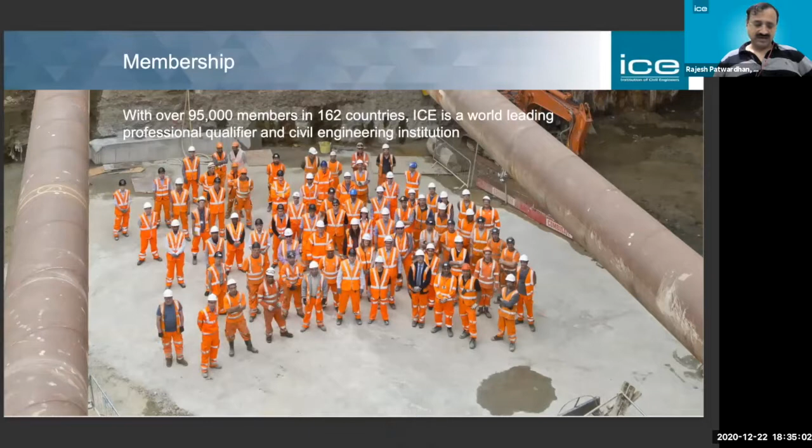Talking about ICE and ICE Mumbai, I would just like to remind you all that ICE is a global organization with more than 95,000 members across 162 countries across the globe, and it's been around for more than 200 years. So it's a very old organization, a very highly reputed organization, for the quality of members that it brings in, for the quality of programs and events that we conduct. And I'm very proud that Genesis Tech Talk has been able to live up to the reputation of ICE.

So benefits of membership, as you would expect to see, events like Genesis Tech Talk, we have been conducting conferences, we have been conducting various mentorship schemes, and we are actually providing a lot of mentor support to professionals who are aiming to become chartered, professionally qualified through ICE. And we have got a number of members who are mentors. I'm probably sharing some information about that too.

The ICE benevolent fund is a very interesting concept. People who need help, financial help, because of various problems that they have been facing globally, once you're a member of ICE, you have access to the fund. So I think it's a great source available for supporting people who are struggling either financially or for some other reasons. And I think as a member of ICE, you will be able to avail a lot of benefits becoming a part of ICE.

Moving further, there are typically five grades of memberships, and one grade that's missing over here is the associate membership. I'll briefly talk about that too. You can engage with ICE by being a student member, and immediately after you're a past student, you can become a graduate member. Subsequently, work towards becoming a chartered member or a full member of ICE, and the highest grade of membership currently existing is the fellowship.

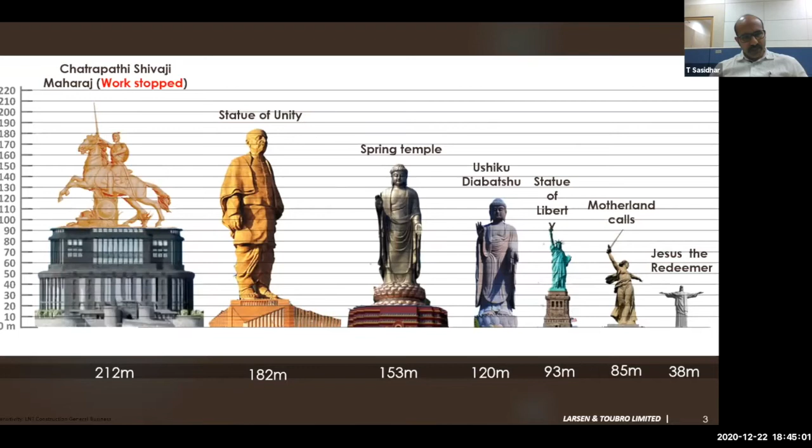Now, when we put different statues in one slide, see how this particular statue looks. Right now it is 182 meters tall, and this is the tallest statue. In fact, we started working on the Chhatrapati Shivaji Maharaj Memorial in 2018, and then it stopped because of certain reasons. And presently there is no work going on. Otherwise, that would have been the tallest statue, which is around 212 meters.

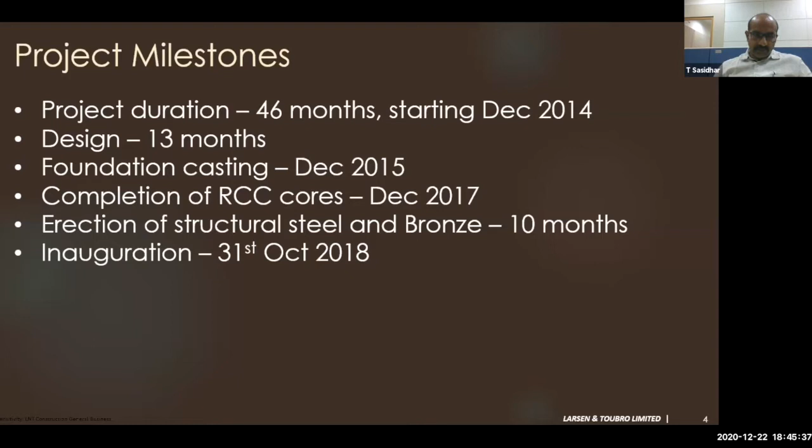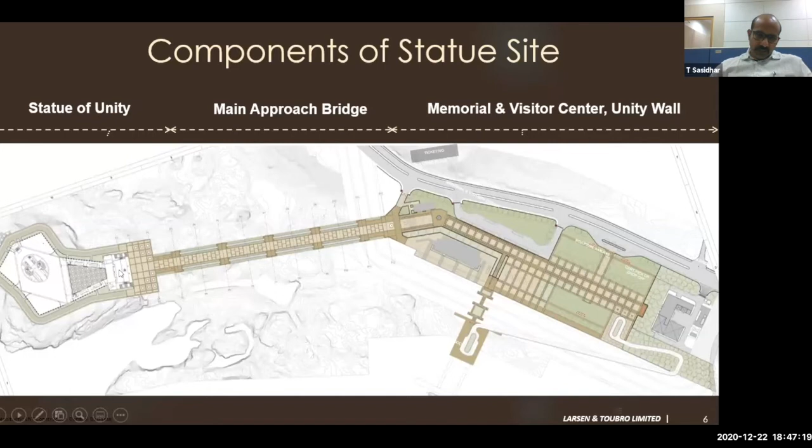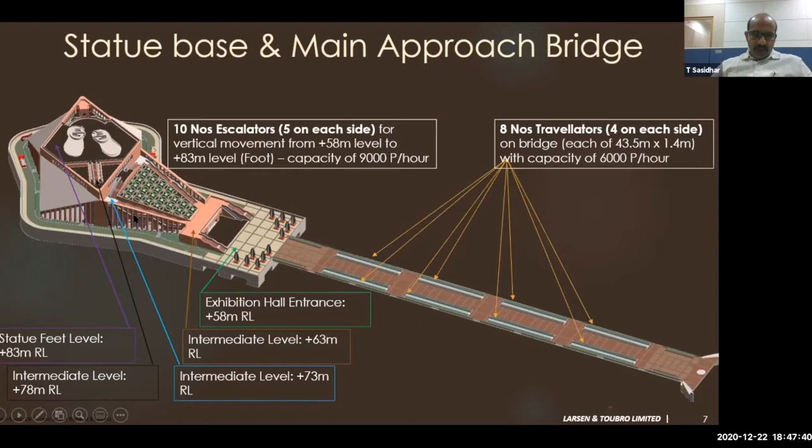We have created a unique feature in the viewing gallery where from the front side of the statue, you can see the dam, and on the right side of the statue, you can see the downstream side of the river. So this is how the entire gallery was created. This is a completely air-conditioned gallery. I'll play a short video of 7 minutes so that you can see how the entire statue was done.

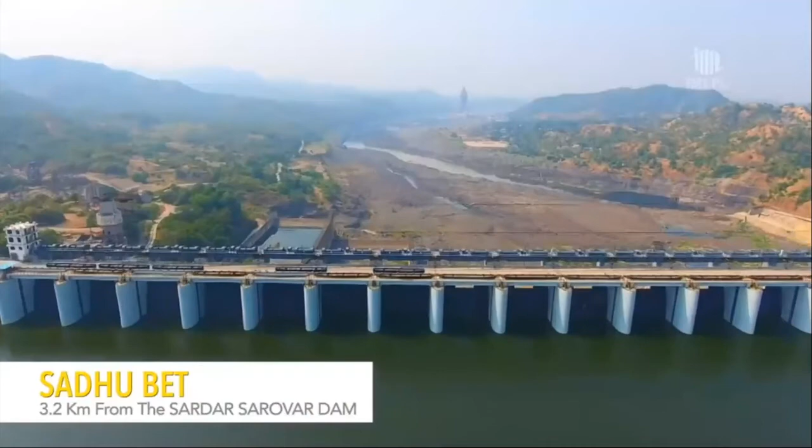On 31st October 2013, Shri Narendra Modi, the then Chief Minister of Gujarat, laid the foundation for the tallest statue in the world, the Statue of Unity. In keeping with its ethos, L&T took up the challenge head-on. Located on Sadhu Bet, 3.2 kilometers from the Sardar Sarovar Dam on the Narmada, the Statue of Unity is an unparalleled confluence of engineering and art. Although L&T had successfully completed a plethora of prestigious projects, including power plants and commercial complexes, a structure of such scale was one of a kind.

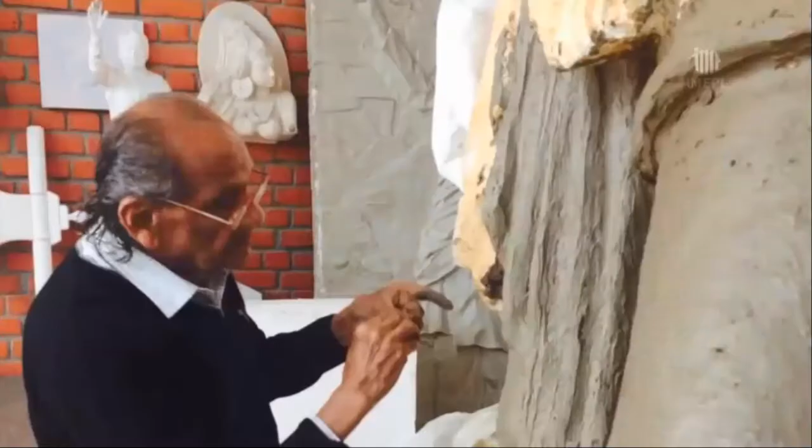The honor of sculpting Sardar Patel's likeness went to Padma Bhushan awardee Shri Ram Sutar. The first challenge was to select an apt pose and expression to do justice to him. Although L&T's role was that of an EPC contractor, they still took active interest in the selection process. Extensive discussions with historians and experts ensued. After sifting through thousands of photographs, the team was unanimous in how the statue should look. Shri Ram Sutar created sculptures in varying sizes, honing every detail again and again. The latest 3D scanning techniques and computer-controlled production ensured accurate reproduction of minute details.

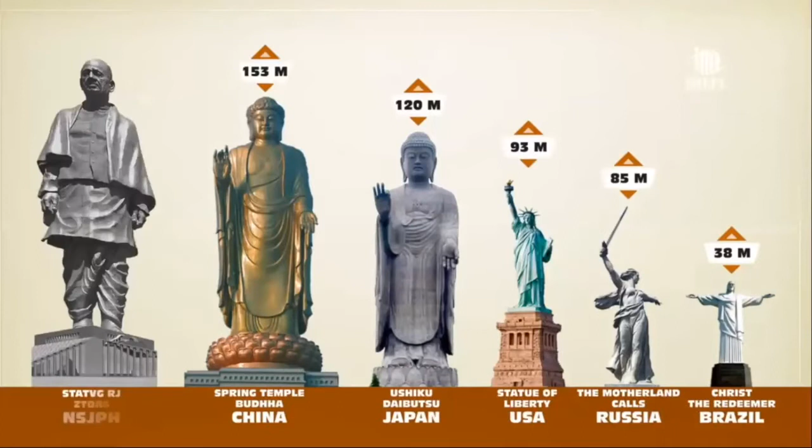Immense statues the world over have a broad base to achieve structural stability. Sardar Patel's statue was slated to be the tallest ever, and the greatest task was to achieve the design. His dhoti needed to end above the ankle. He is in a walking stance, thus the feet were not parallelly aligned. The assertive stride meant a gap between the feet. But the L&T team was equal to the task.

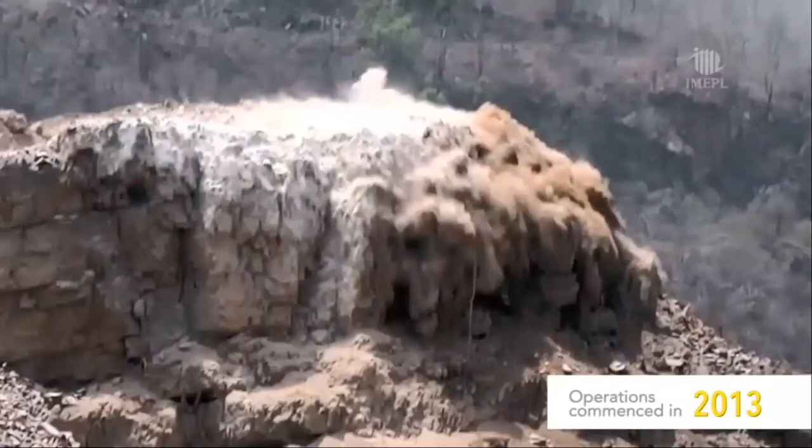Operations commenced in 2013 with exhaustive surveys of the land, riverbed, river and wind. This was followed by critical engineering design, a test of L&T's experience and technical capability. In such a remote location, planning and logistics would be the key to all the operations.

The Loha campaign was launched in earnest with a view to employing used implements donated by farmers around the country as a symbolic tribute. This iron forms the steel rebar in the raft foundation, a homage to the Iron Man of India.

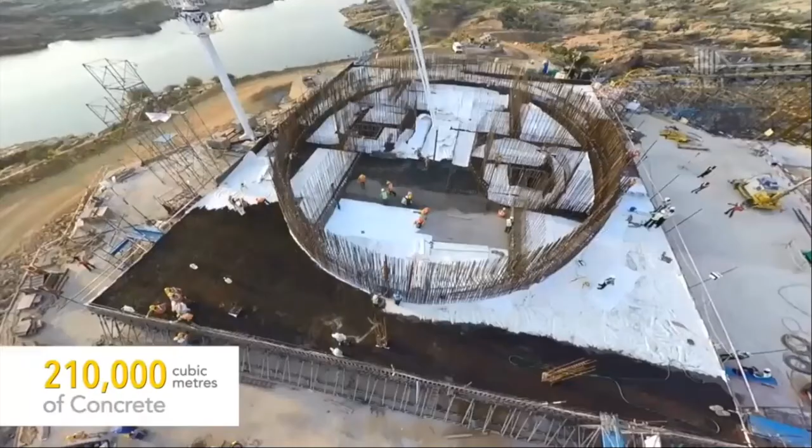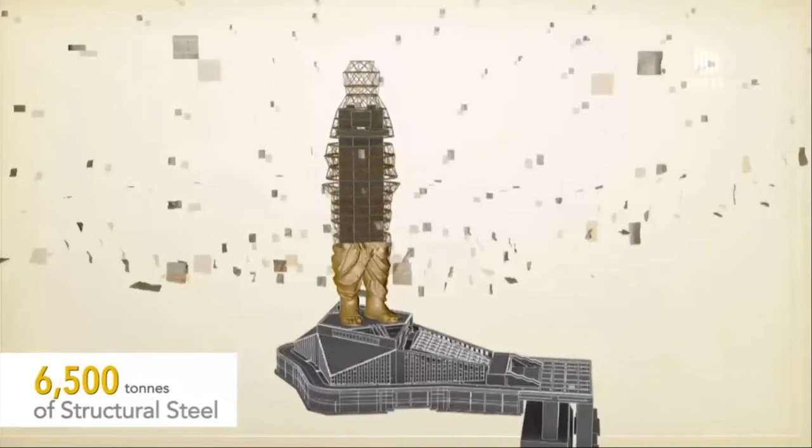A reinforced concrete core, created with critical concreting methods, gave the structure a stable base. This would support the primary and secondary steel trussing. The bronze plates then covered the entire structure, forming the sculpture. Locally available sandstone and Banswara marble has also been used.

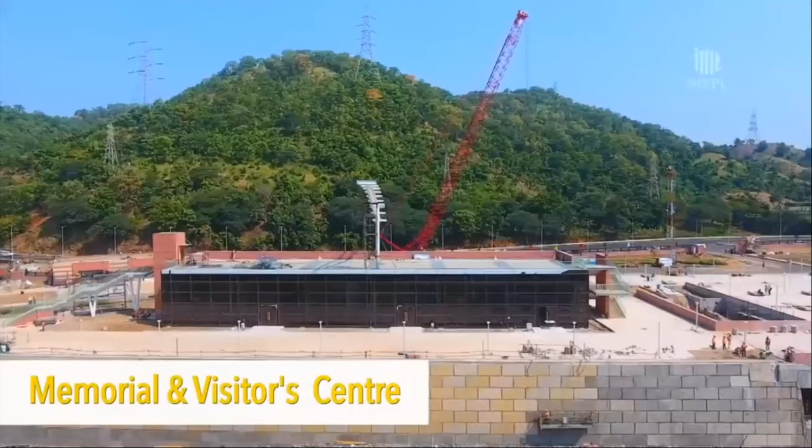Besides the statue, other key elements like the memorial and visitors center, main access bridge, bridges and roads were made to precision. The Shresth Bharat Bhavan is a 3-star facility for the tourists and guests. To bring socio-economic development to the region, students and vendors from nearby villages and towns were also trained for the project, thereby generating ample employment.

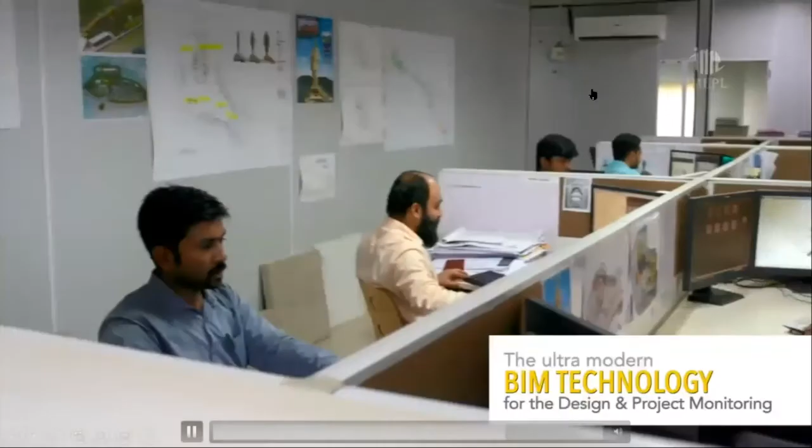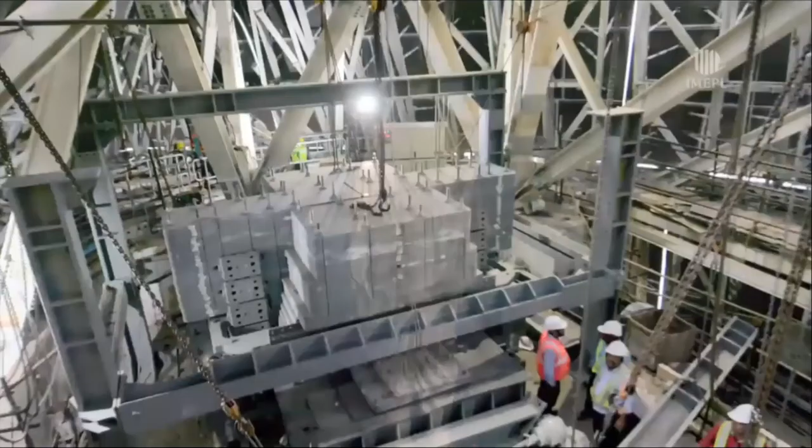The ultra-modern BIM technology for the design and project monitoring brought synchrony between the team and 30 consultants globally. The statue houses two 250-ton suspended tuned mass dampers to make it stable enough to withstand violent winds plus seismic activity. L&T created macro panel assemblies on site for the smaller micro panel bronze castings. This ensured speed and seamless assembly.

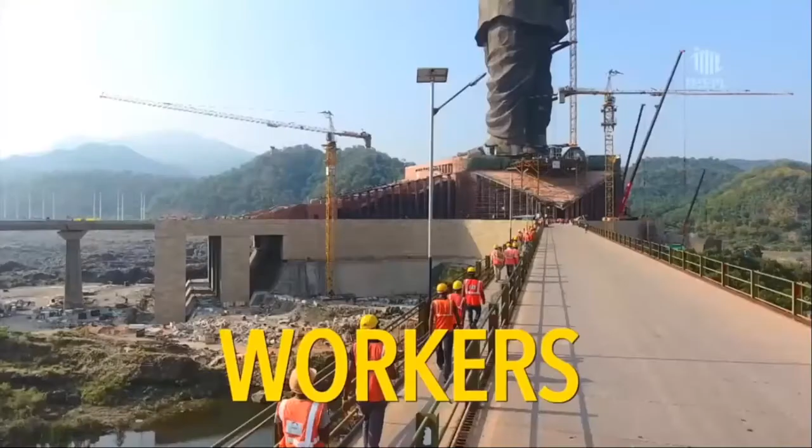Every plate was unique and RFID tagged and bolted in its place. As work progressed at blazing speed, the engineered structure transformed and the statue began to take shape. Designers, engineers, experts, specialists and workers from different parts of India have toiled night and day in a united effort unto one goal: the Statue of Unity.

Colossal enough to remind future generations of his epochal contribution. A structure as enduring as the vision of modern Indian nationhood. As Sardar Vallabhbhai Patel himself said, manpower without unity is not a strength. Only when harmonized by unity does it become a spiritual power.

That was a very short video which shows a complete glimpse of the project. Now I will take you further on various aspects. The entire project was designed to handle around 15,000 visitors per day. But after inauguration in 2018, we came to know that on peak days, like festivals and weekends, the crowd used to be more than 30,000 to 40,000. So already the facility started getting cramped.

And the viewing gallery was designed to take 2,000 passengers per day. It was not designed to take all the visitors to the viewing gallery, only a specific number of visitors, because of the limited provision of lifts inside the statue. And the statue is designed for a wind speed of 180 kilometers per hour, and it was designed for seismic zone 4.

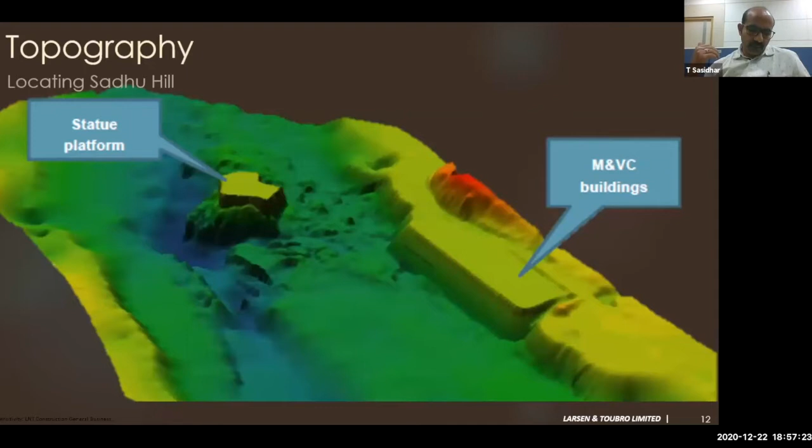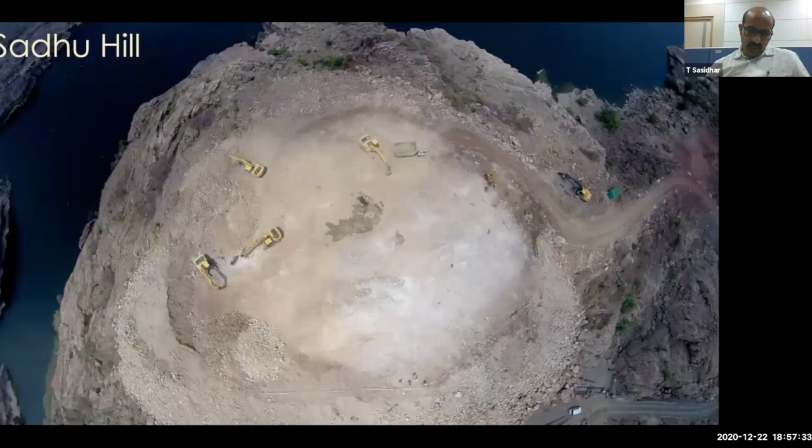And this is how the topography looks when we did a complete bathymetry survey, topography survey, and various types of surveys, merging all the details to see how the riverbed and contours look, and then to take appropriate decisions and study the water flow effect on various embankments. The work started with cutting of the hill to reach the foundation level. These are some of the photographs.

Now coming to deriving the statue profile, this is one of the most important aspects of the statue. How do we derive the entire profile of the statue, from a 6 feet tall person to 182 meters height? Something which is unique. So each and every detail of it has to be developed in a systematic way. The entire process started in August 2014 and concluded in May 2017. Multiple steps were followed.

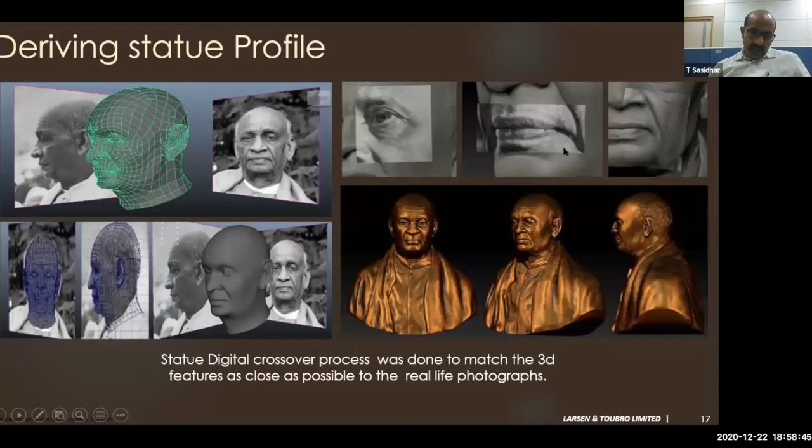Initially we were given a particular posture, the one available outside the Ahmedabad airport, where Sardar Vallabhbhai Patel is in a walking posture. That posture was given to us to start the entire design. Then various meetings were conducted to see how the face, the eyes, the lips, the wrinkles and the head should look, and each and every aspect was to be detailed precisely.

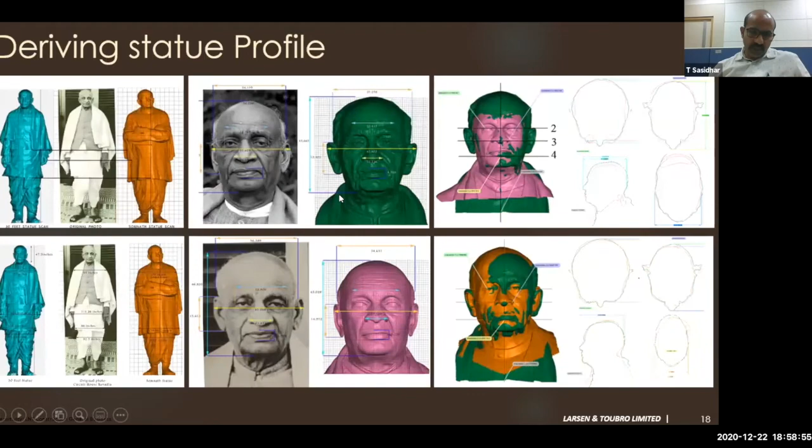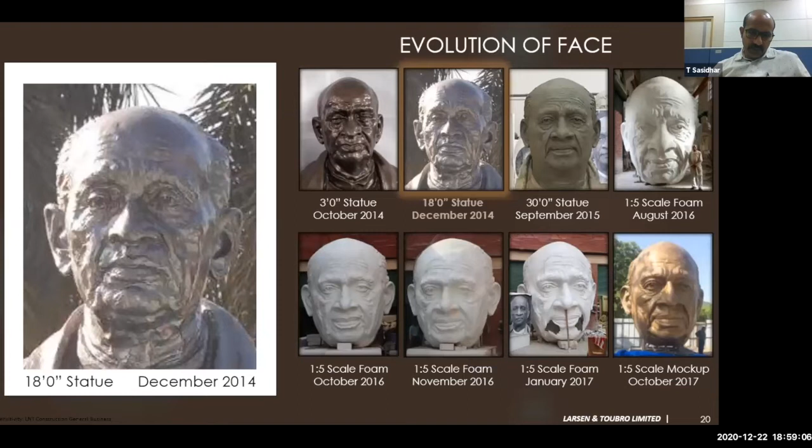This is the photograph which was given to us, and based on this, the sculptor developed various models. It started with a 3 feet statue in October 2014, then we went to an 18 feet statue, and then a 30 feet statue, done in 2015. We got principal approval of the face, but we required a lot of corrections in the face, and then we did a 1:5 scale foam mock-up in 2016.

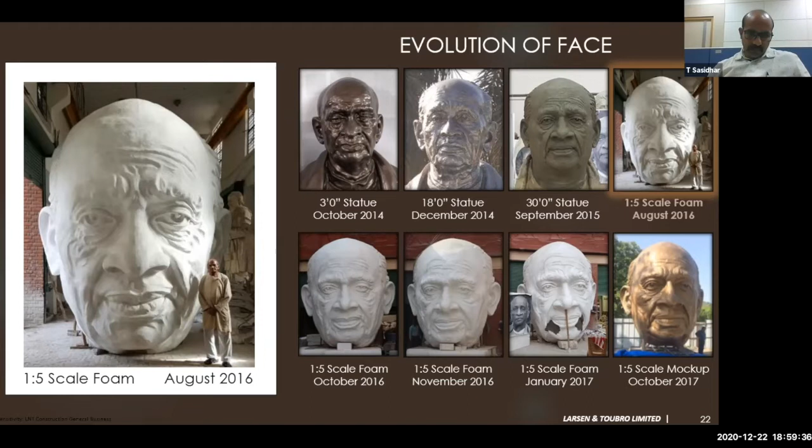This is the 1:5 scale mock-up, and this is the same head which is actually kept in the base of the building. Later on, certain corrections were done in October 2016, some more corrections in November, and then finally in January 2017, this was finalized.

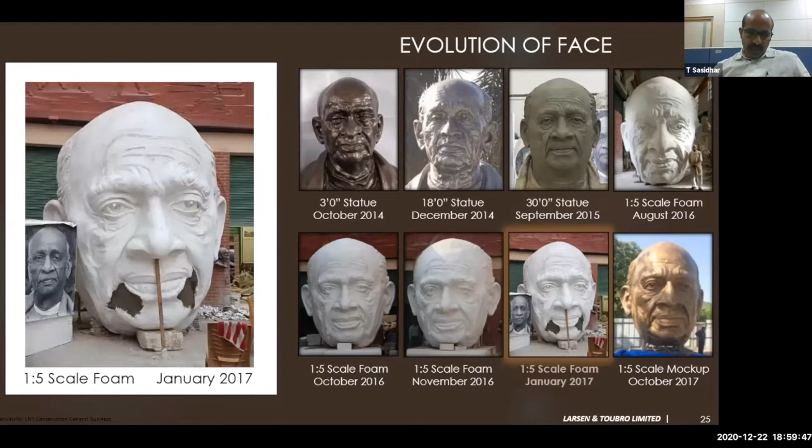And then we finally came up with the actual bronze 1:5 scale face, and this was finally moved to the museum where it was displayed. So it was an elaborate exercise to arrive at the face and how the expression looks like, and each and every aspect of the character of the face. It's not only about the face, each and every parameter of the entire body, like how the shirt, the shawl should look like, how the dhoti should look like, how the various parts of the body should look like, how the button of his jacket should look like.

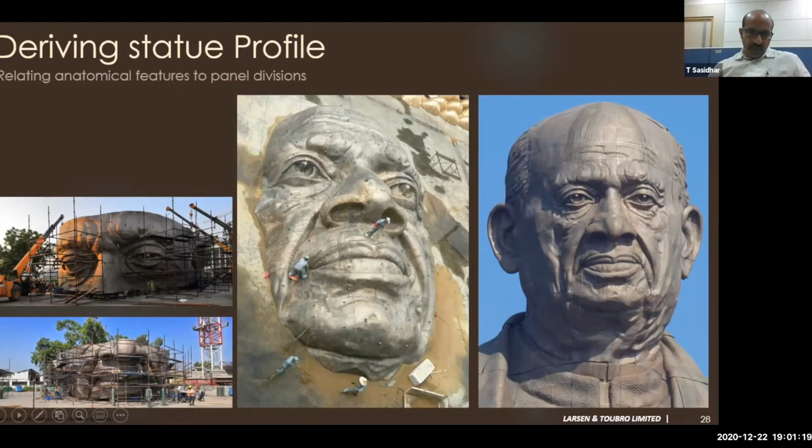And we also did a study on how the statue will age and how the statue will change its color, because it's a bronze, and we have not given any coating to the bronze. It's a natural finish that we have given to the bronze alloy. So in a natural finish, it will form a patina, and it will change its color from this brownish color to greenish over a period. It is exactly similar to the Statue of Liberty. Right now in USA, you can see the Statue of Liberty is completely greenish. That is because over a period of time, the alloy will change to greenish. So this particular alloy also will change to greenish after certain years.

So basically this alloy consists of copper 88%, tin 8%, and zinc 4%. So this is the composition. The tin is basically added for strength.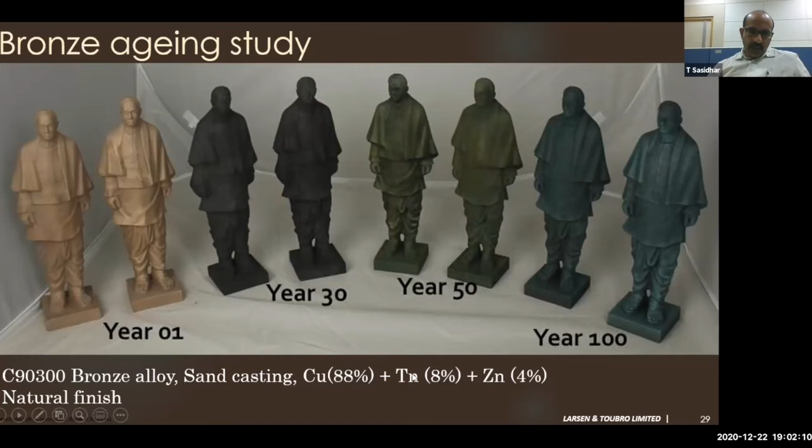And coming to the actual design, we were asked to design the structure for 100 years design life. There are few codes which talk about 100 years design life. And when we say 100 years design life, the selection of each and every material and its use is very, very important, and defining the durability of the materials is very important. This is where the experience of the consultants comes into place to define what grade of concrete, what kind of steel, what kind of coating for the steel you need, and what is the cover.

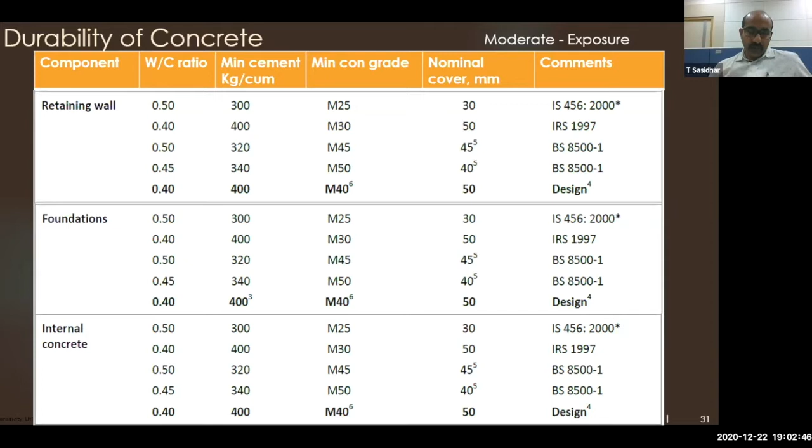All those parameters are derived based on the 100 years durability requirement. So these are some of the parameters which we have used to arrive at the 100 years design life. So ultimately, we had to use 50 millimeter cover for all structural elements to ensure that there is no corrosion of rebar happening inside within this 100 years design life.

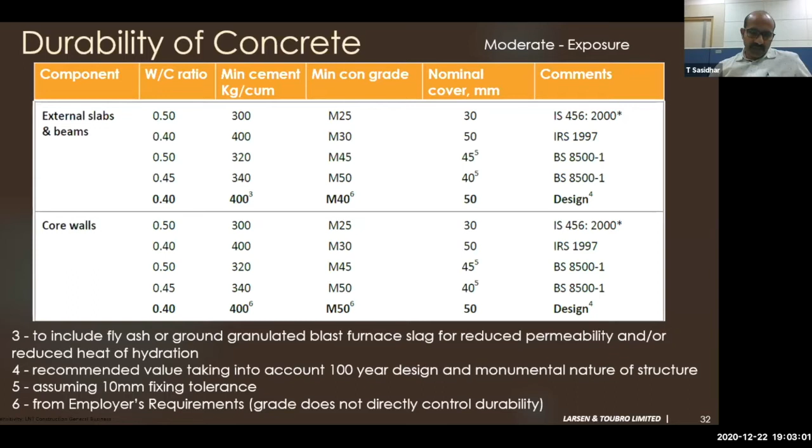And the structure is designed for 50 meters per second basic wind speed, when the code says it is 39 meters per second. So ultimately, there is an inbuilt factor of safety of 71% which the structure carries. And when it comes to seismic, as per the code, it is zone 3, whereas we were asked to design for zone 4. Again, here there's a 50% redundancy in the design.

Now, the most critical part of the design is the ankle. We don't have sufficient stiffness at this particular location, as the ankle is completely exposed. So we had to use this cross section very effectively to transfer the complete lateral load as a moment at this particular location to the statue base. So that was the challenge given to us.

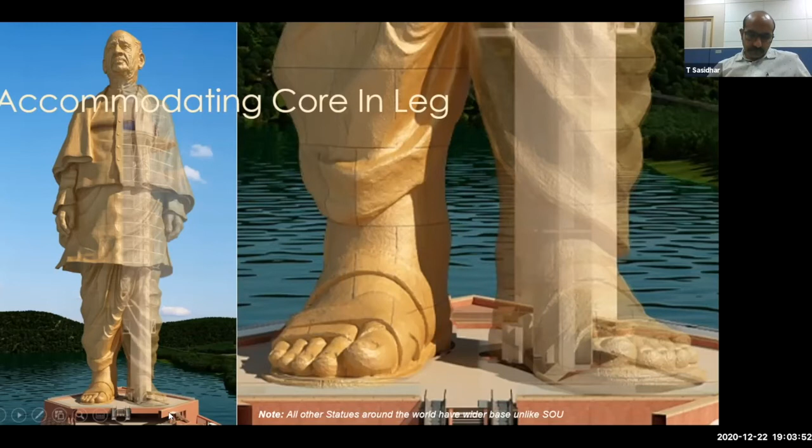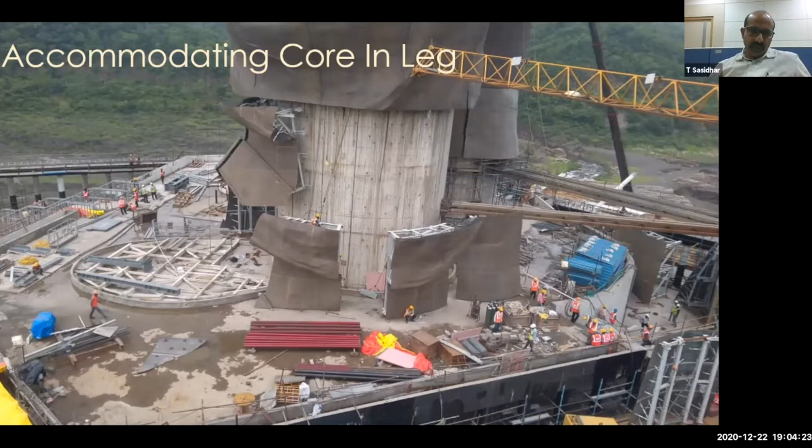So in this particular slide you can see the gap between the concrete surface and the bronze skin. We hardly kept around 500 to 600 millimeters here. That was the only gap available, and that gap was used to fix this panel with minimum steel. So the entire cross section of the leg was used for generating the stiffness of the structure, so that we get the required strength. But however, what happened is when we checked the structure for wind tunnel analysis, we did this wind tunnel testing in Canada.

RWDI has carried out the wind tunnel test in their facility, and when we got the first set of results, we found that the structure is not capable of transferring the force at the ankle level because of very high level of wind. So then we came up with the provision of using tuned mass damper, and by using tuned mass damper, we have increased the damping of the structure to 4%, and reduced the structural wind loading on the statue by around 30%.

So this is how the effects of wind were taken up, and the strength of the structure is accelerated by adding this tuned mass damper. So we have used two tuned mass dampers, and these are installed above the chest level on top of the concrete core, and each weighs about 200 metric tons. These are all pendulum type tuned mass dampers, and there is no electromechanical here. When there is an event, it will activate. So it's a simple viscous type damper we have used.

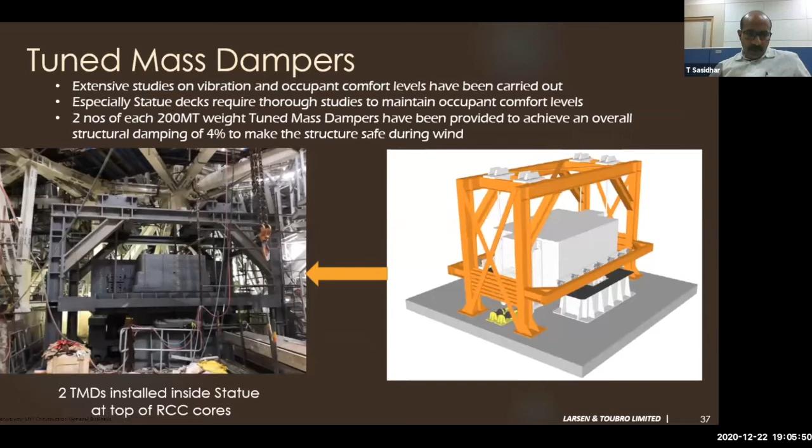And when it comes to the structural idealization, we have the two cores going up to above the chest level here, and then these two walls are connected with the coupling walls. The core walls are connected with the coupling walls up to the gallery level. Since there is an opening here, this coupling wall starts somewhere here, and then it goes up to the viewing gallery level. And once that is formed, then the skeleton of the statue is formed using the primary steel.

The primary steel is divided into these 5 segments. We have an upper leg, and then we have the lower body, then the upper body, then we have the shoulder and head portion. So now if you see, these are all disconnected. There is no connection between this piece to this piece. We have completely isolated this so that all these do not act together. So when there's a sway, there is not much movement within these two, and all the bronze panels will be within the limit. And each bronze panel again has its own movement when such kind of wind or seismic activity happens.

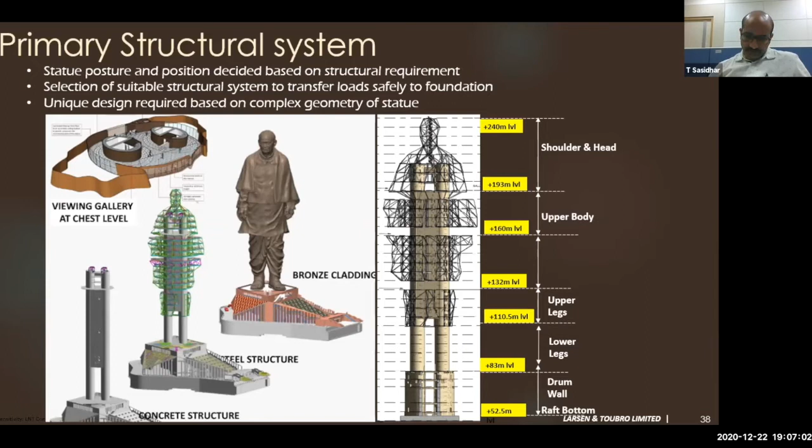So we have used concrete grades of M60, M65 for the main statue, and M40 for torsional slab, all the slabs, and then the TMD slabs M50. And generally the grade of structural steel used is 350. And the bronze cladding is 8 millimeter thickness.

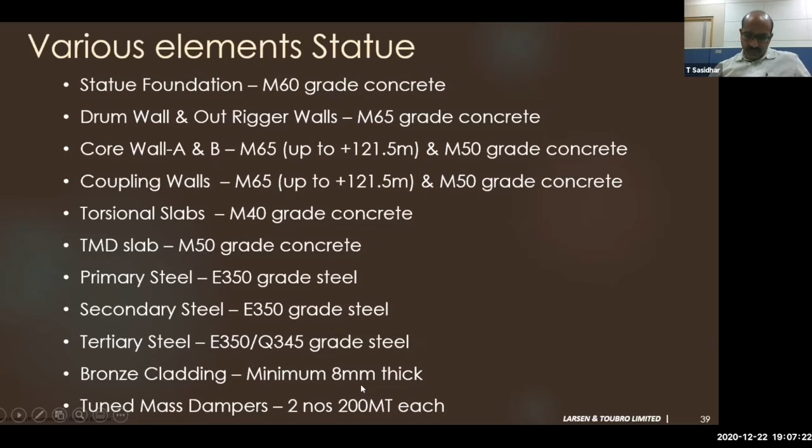And this is the foundation pad which is used for the main statue, which is 34 meter by 44 meter, and the thickness of the raft is around 3 meters. So it's an open foundation on which the entire statue rests, because we have very good rock. 750 tons per square meter is the strength of the rock. So these are some of the photographs of the raft in the initial stages of the project.

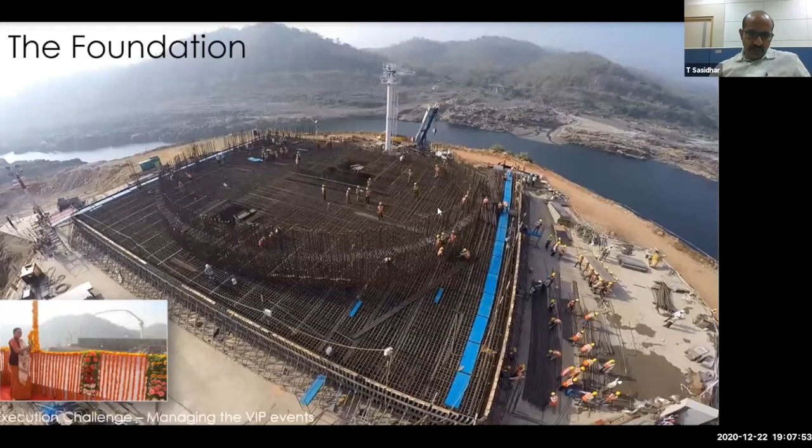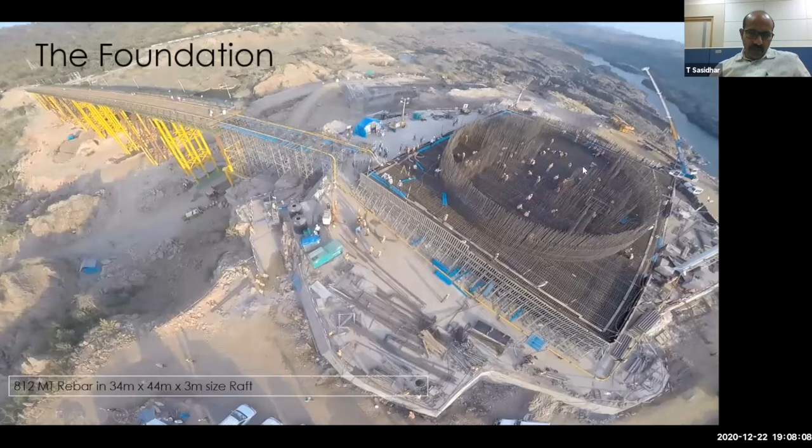And over the raft, we have a big wall, which we call a drum wall. And inside the drum wall, we will have these 2 cores which are coming out. And you can see some of these photographs where we had to construct a temporary bridge, a bailey bridge, so that the material can be transported here, because the main bridge could not get ready during this construction time. So some of the logistics during the foundation casting.

And we had to do a lot of leveling of the hill to get the desired shape, and a lot of mass filling of concrete here. We did a lot of CLSM concreting here, and then over this the entire museum structure comes. And we had to take a lot of care to reduce the heat of hydration in the concrete, because huge mass concrete was done. So several aspects were taken care of in concreting. Especially we used to do it in the night time. A lot of ice was added to concrete in the batching plant, so as to maintain the temperature at a lower level.

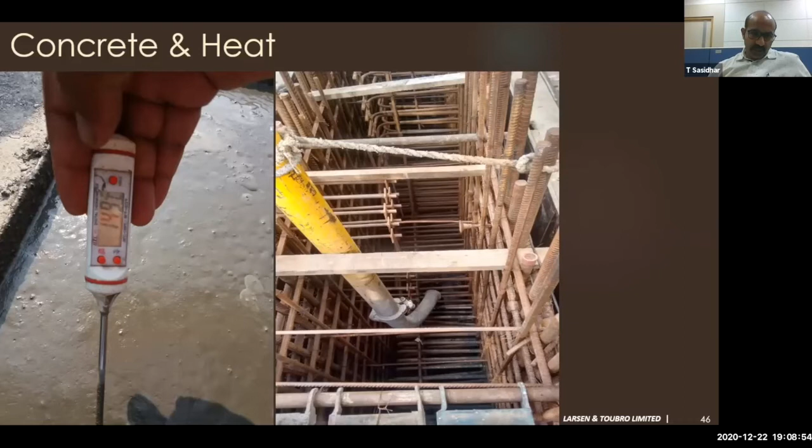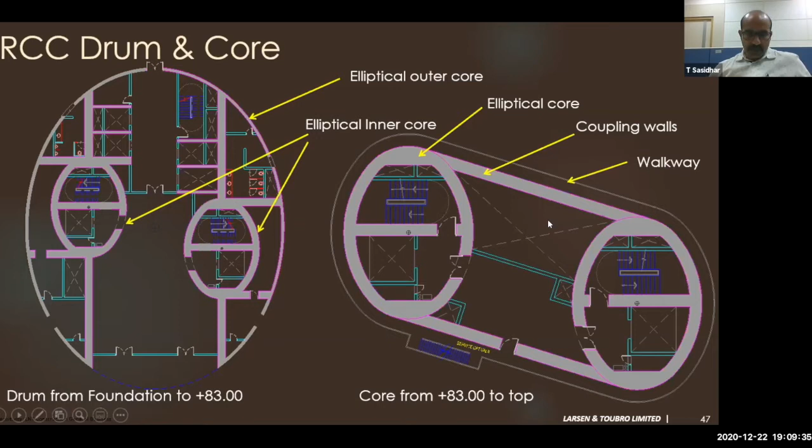And during any emergency, people can come out through the staircase, and they can go from one core to another core uninterruptedly. So these are all the safety precautions, and the structure has been designed as per the life safety norms.

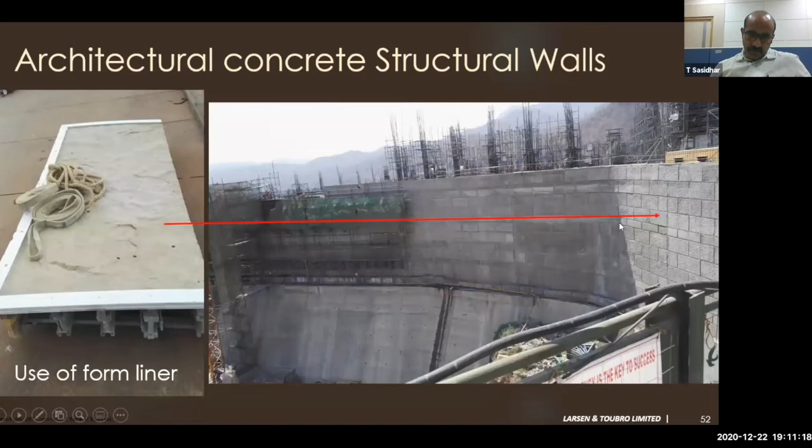So some of the photographs of the statue base during construction. We used a form liner, and we put the liner inside the shutter, so that the entire perimeter wall on the statue base gives a rock finish. And we actually painted over this with a brownish color, so that when you see it from a distance, it looks like a rock finish. So these are certain things which we have used.

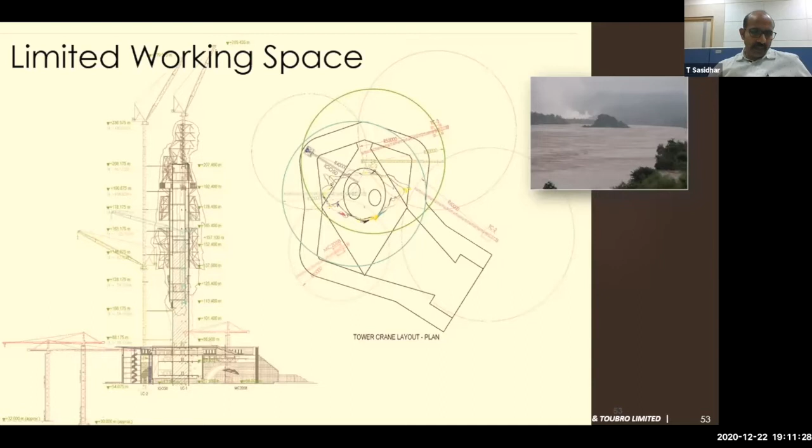And now coming to the main portion of the statue, that is how to erect the statue. We had very limited space. It's a small hill. We cannot do scaffolding, so we had to use only tower cranes. We put one tower crane on the back of the statue and one tower crane in one of the cores. So these are the two tower cranes we used to do the complete erection of steel and bronze. And this is how the reinforcement inside the core looks, very congested, a lot of bars, 32 dia bars, 28 dia bars, and a lot of embed plates to fix the steel.

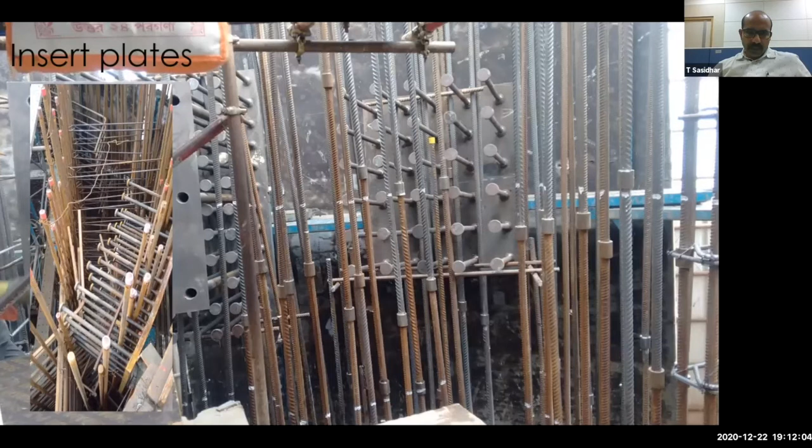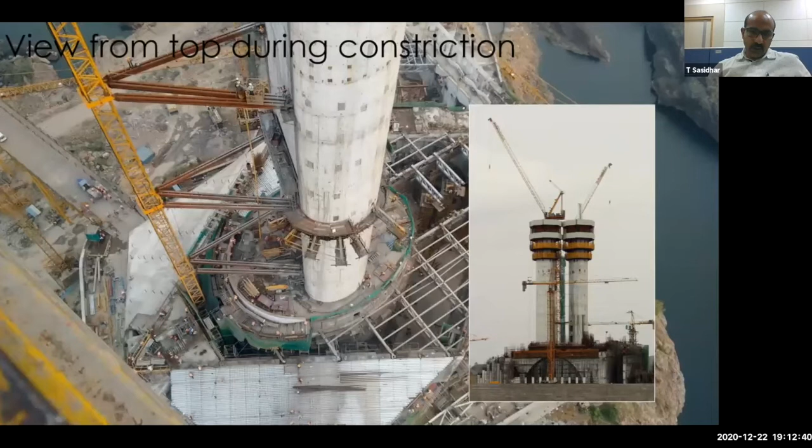And these are some of the photographs. Basically jump formwork was used to take the cores up. Initially, we started with around a 30-day cycle time for one lift. And when we did the final pour, we were able to reduce it to a 7-day cycle. So there were a lot of steps which we cut down, and a lot of standardization we did to reduce the timeline and the cycle time for taking up the core. And this was the last core which was taken up.

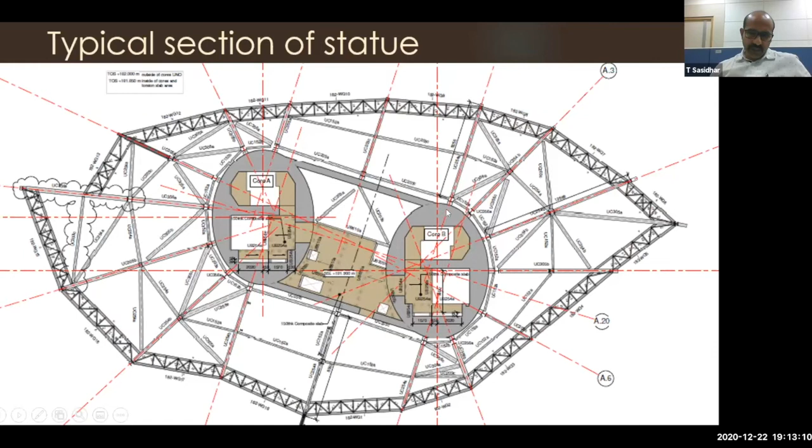And if I take a slice of the body of the statue, this is how the steel and the cores look. We have two cores here connected with a slab, and then we have the skeleton of the steel, and then we have the girders. These are called wind girders, and the bronze panels are hooked to these wind girders so that the bronze transfers wind load to the wind girders, and in turn it transfers to the core. So that's how the structure was designed.

And these are some of the photographs where we can see the various parts of the body. Here you can see a lot of staircases and platforms were given inside, so that the statue can be maintained well from inside, so people can go inside and see each and every part of the body. If there is any rectification needed, any bolt is loose, you can tighten it. So complete provision of platforms is given. You can see here the staircases and platforms at each and every level connecting this.

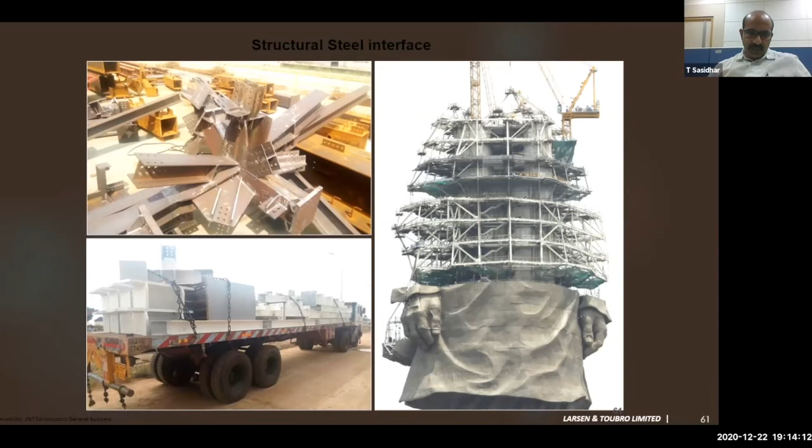And the entire structure was galvanized. It was fabricated at one place, galvanized at one place, and after galvanization the material was again taken to the factory for further painting. In fact, it is a dual painting, so we are assuming that this will give at least 50 years life for the painting. So that's the level of protection that was given to this particular element. Some of the photographs during erection of bronze and steel.

And the next element is the bronze. We talked about the alloy. There are in total 550 macro panels. Each macro panel is made up of 9 small panels, and they're all welded. And each small panel, the micro panel, is 1.83 by 2 meters. And this panel is actually cast.

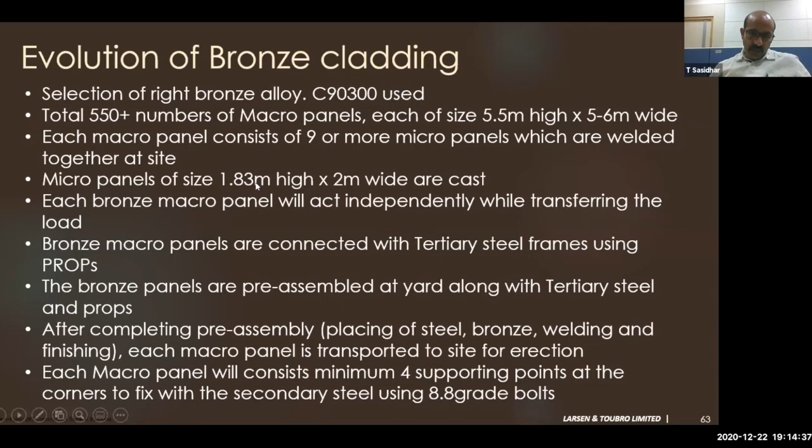If you see here, there are 9 panels here which are welded vertically and horizontally. And each panel is actually cast in the factory and then brought to India. And we assembled these panels and then welded with the same alloy, and then made it as one single panel. And you can see here, this is one of the panels which belongs to the waistcoat of the statue.

And you can see the texture, how it was created. These are all manually created on the foam model. And then when you take the mold, when you pour molten metal inside, you will get this shape. And these are all the testing samples; each and every piece was tested for strength and chemical composition.

And globally, all the statues were built by providing scaffolding from bottom to top. And this is a Shiva statue, which was under construction a few years back in Jaipur, in Rajasthan. So if you see here, everywhere it is fully cladded, and people used to work from outside. Whereas for this particular statue, there is no scaffolding provided. The entire structure is completed using only the tower cranes.

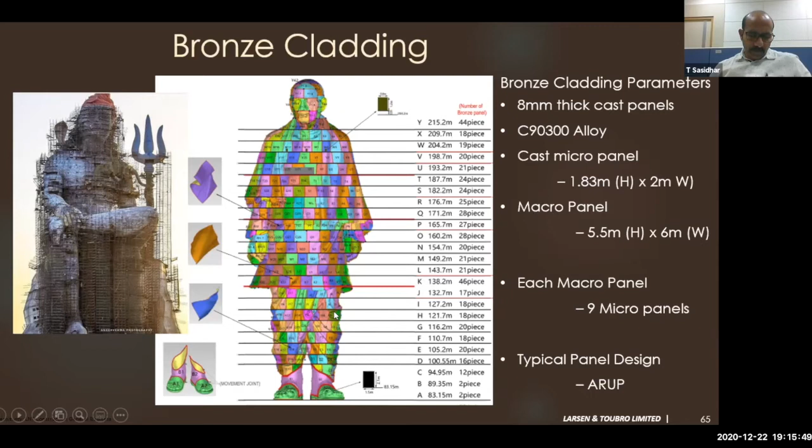So this is how the entire panelization is done. This is one of the most complex activities. How do you divide the panels? The panel weight, including the steel on the backside of the panel, should not be more than 8 tons. That is the lifting capacity of the tower crane. So we have to limit each and every panel weight within 8 tons, and then do the panelization.

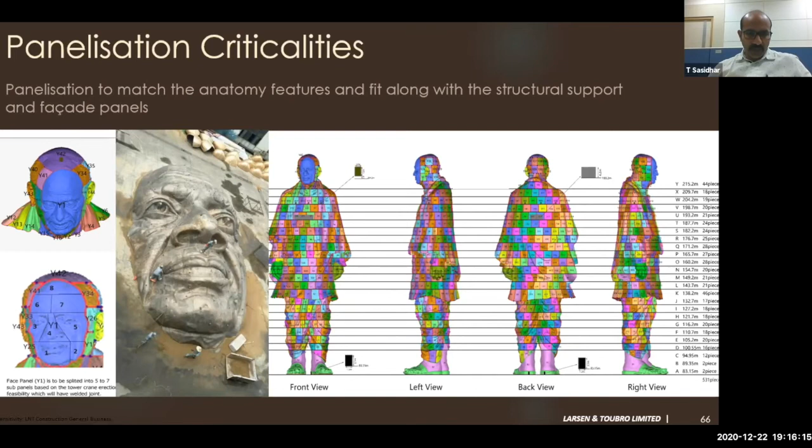So some of the panels had a lot of openings, so that there is ventilation happening inside. So there is air passing inside. So we have provided a lot of openings for various panels, like the concealed areas and areas in the ears. There are holes, and there are certain locations where we have provided maintenance hatches, so that people can come down and clean the surface.

And if you see, this is the shawl, bottom of the shawl, how the threading work is done; in fact each thread height is almost 2 feet in reality. So each and every item is very precisely done, and these are all during the erection time, and later on these were all taken to the position, fixed properly and all the gaps closed.

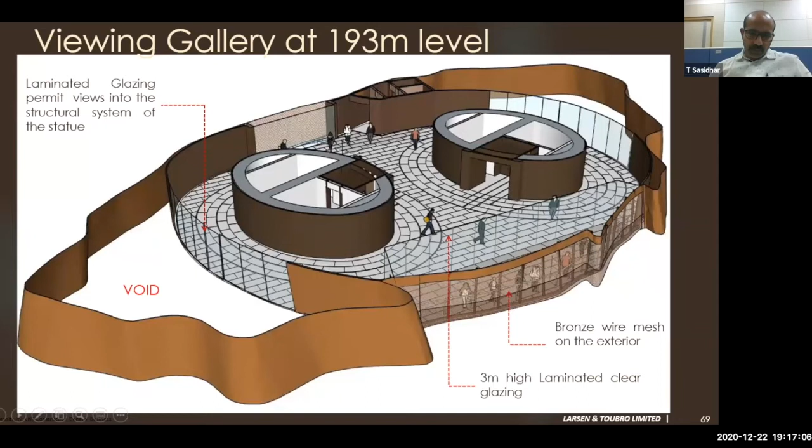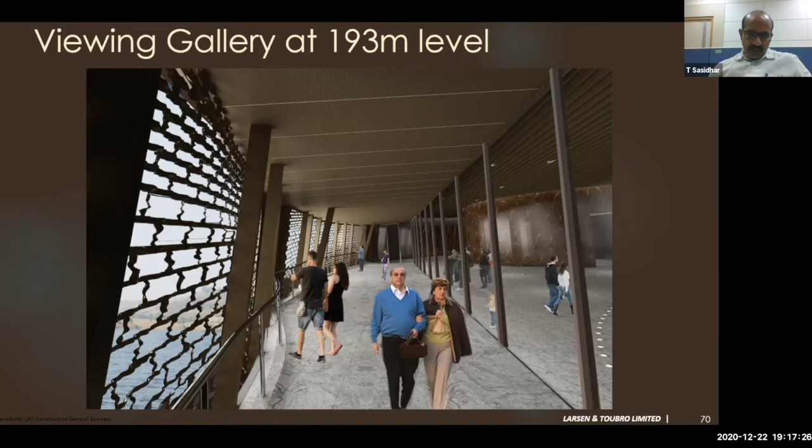This is the viewing gallery which we talked about, and this is how the viewing gallery looks inside. So this particular texture is created in such a way that from outside it doesn't look like a big opening like a window. It looks like a very coarse mesh, but when you go inside, you have a very clear window, you can see through. So that's how the entire panelization was done with respect to this viewing gallery panel.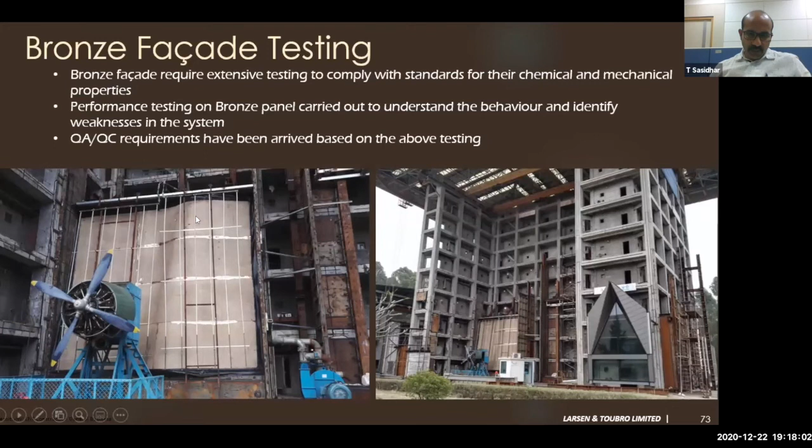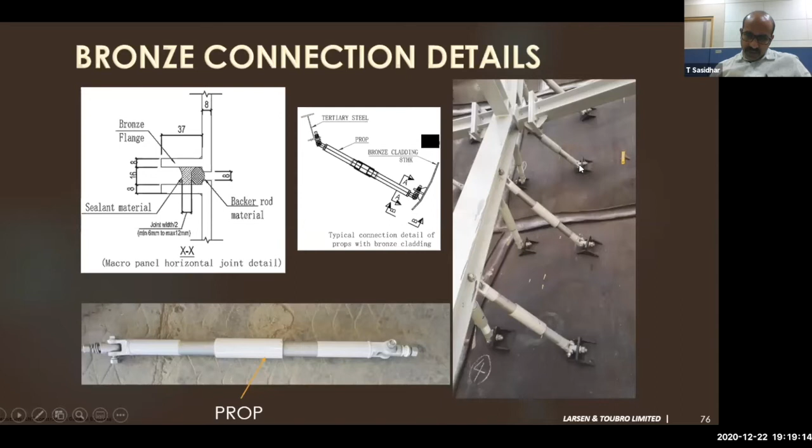And more importantly, we have a Teflon washer here, because there should not be bimetallic corrosion between steel and bronze. So at every joint we have kept a bimetallic corrosion separator, a Teflon washer.

And this is how the typical bronze pre-assembly looks. So these were the panels which were stacked in the yard before the panelization, the pre-assembly. So we did pre-assembly of each and every one.

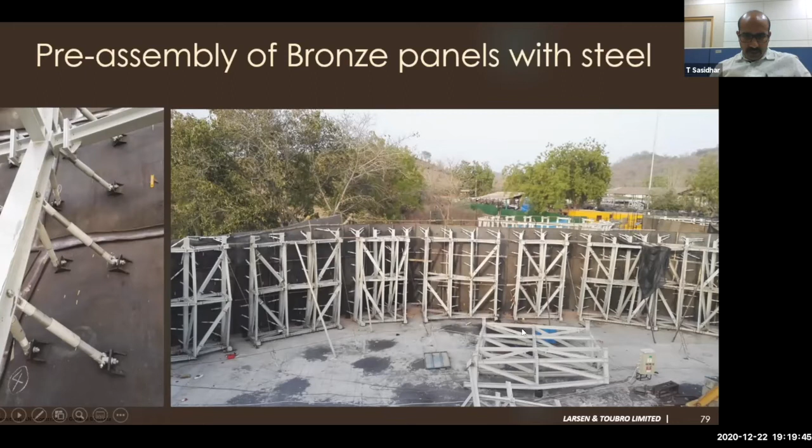We had around 25 levels of the entire statue, which is sliced for 5.5 meter height. Each slice is 5.5 meter. So this is 5.5 meter height, what you are seeing here. Now this is one panel. This is one panel, and this is one panel, and this is one panel which will go for erection.

And this is one level of the panel below the kurta portion. It was done reversed way to support this curved portion. And this was the very complex portion of the pre-assembly which we have done.

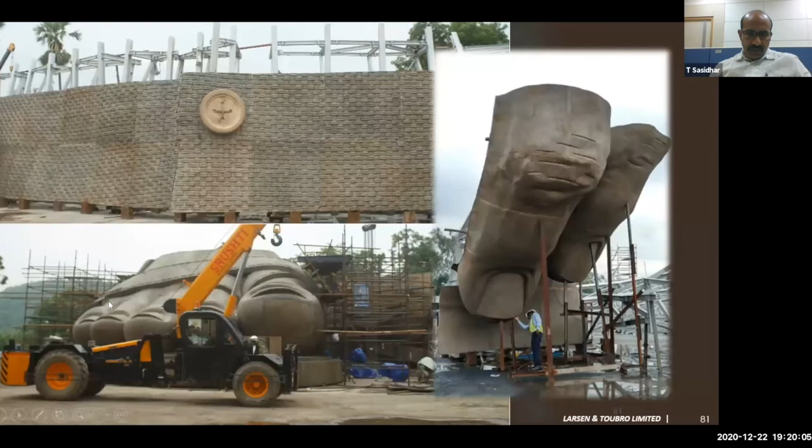And you can see here, this is the foot, and then this is the button of the waistcoat and the texture of the waistcoat and the steel on the backside, and then see how the details of the nail and then the folds here. Each and every aspect of the statue was detailed to the highest level of accuracy, and each and every detail was approved by the sculptor Ram Sutar, and the same thing was done in each and every location. This is the portion of the face,

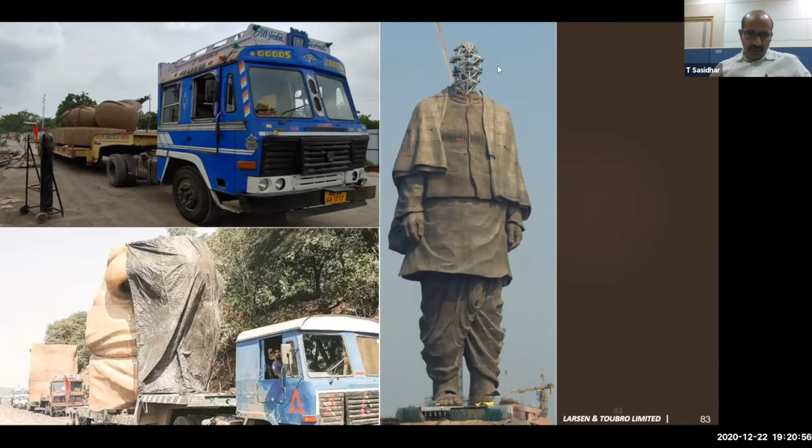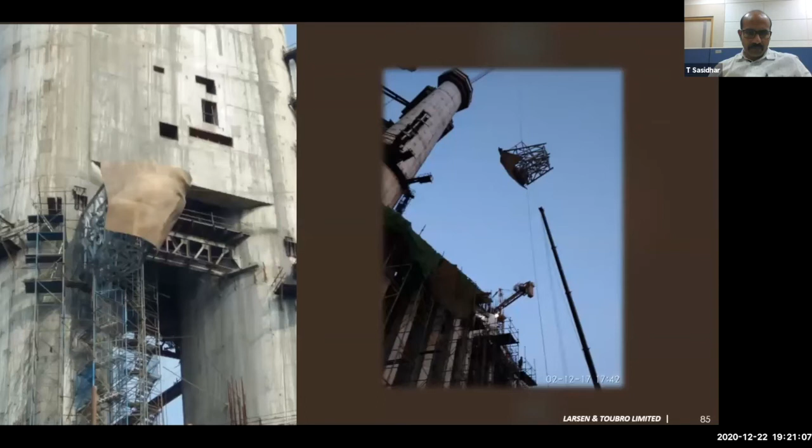and each and every element was taken through the trucks. It was around 3 kilometers from the place where we have assembled to the site location. It was 3 kilometers, and then you can see the panel erection. And this was the most complex portion of the erection of the statue, the head portion. And these are all certain slides related to bronze and the steel erection. Some of the slides, some of the photographs during night.

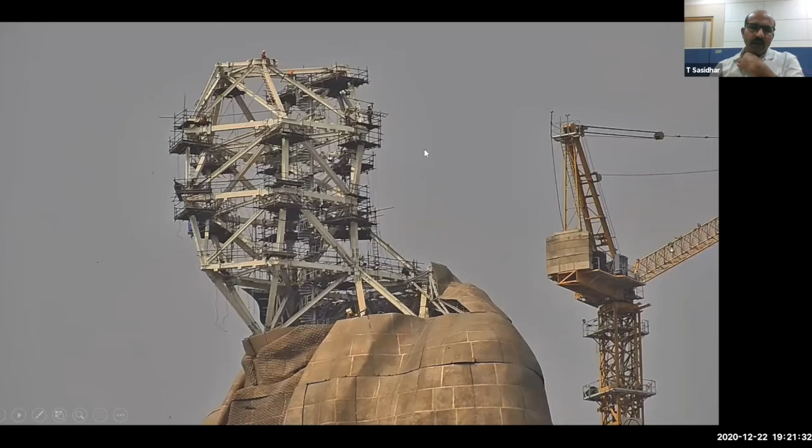And this is one picture. If you see here, the entire face is outside the center line of the body. It is completely outside. Each and every node, positioning each and every node of the structural steel was a challenge. So the entire erection of the steel was done by contractor Eversendai, and they have done a fantastic job in aligning the structural steel to the last millimeter of accuracy, and we didn't have any problem in the assembly of the face. As the steel was done very accurately, we could assemble all the panels.

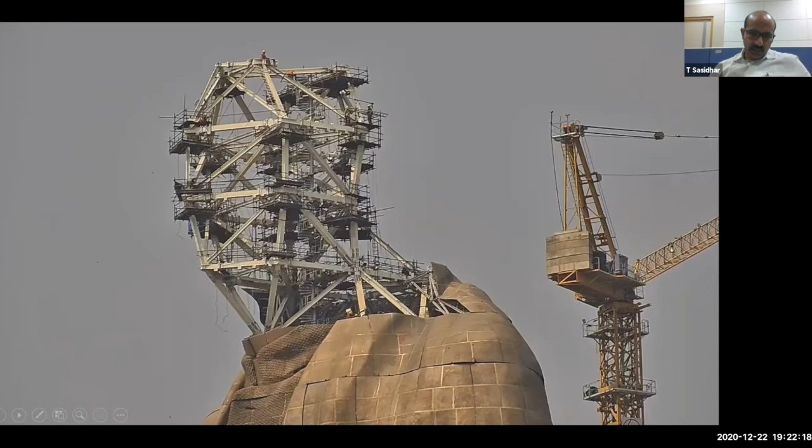Now, one more important point, you can see one spiral staircase going through here. So this is the last element which will connect to the top of the head. And on the top of the head also, we have one openable hatch. So from the openable hatch, the person can come through a rope system and come down, and that was given for the cleaning of the statue. So each and every corner of the statue inside can be accessed through various platforms and staircases.

And we also installed a health monitoring system, parameters like measuring the displacement of the statue. And then we have installed accelerometers at various levels. We have installed strain gauges. So these are all part of the system, so that we know how the system is behaving, and whatever parameters were arrived during the design, whether they are remaining same during the life of the structure. So these are all connected. Finally, the entire measurements will be connected to a computerized system, and it will be continuously monitored.

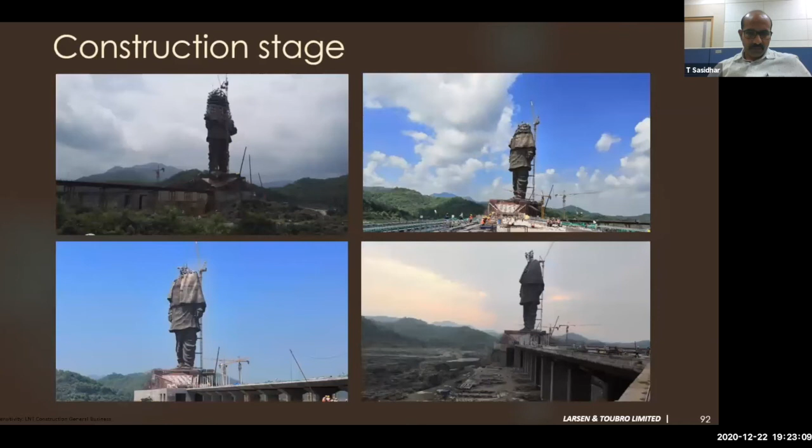These are all some of the photographs during construction stage. Some of the photographs. And all these photographs were from my library. Whenever I used to go to site, I used to collect a lot of photographs. So I compiled these photographs as part of my library.

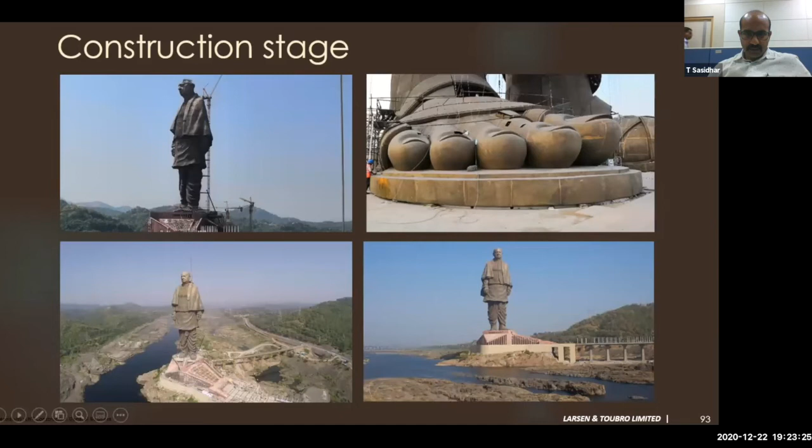And these are all the joints. Now you can see here during the pre-assembly and all these joints. And then we did shot blasting of the panels from outside at site. We used a copper slag for shot blasting. And all these joints over a period of time, they will merge with the skin of the bronze. When we erect this panel, these lines will be visible for 6 months to 1 year, and then after that they will fade out, and all these joints will merge with the color of the bronze. That's how it will behave.

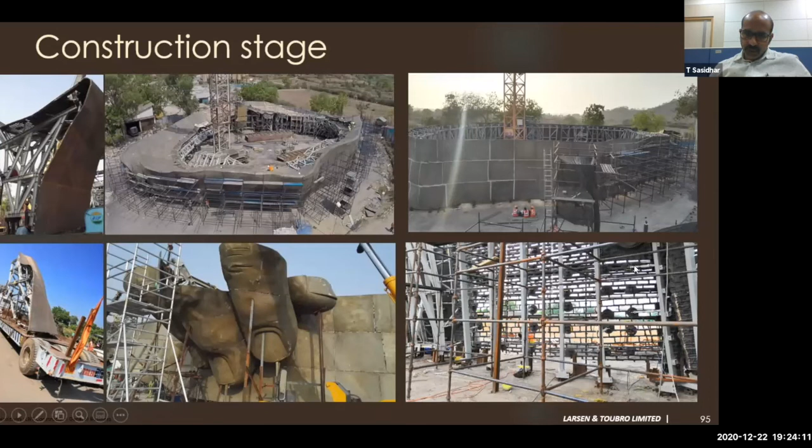So this is the viewing gallery portion of the statue, which was pre-assembled at the ground level. And this is the riverbank protection which we did, where we planned here a small jetty, and when people come on board, then people will come up like this, and then travel through the bridge. So a lot of protection works were done along the river so that the structures are safeguarded.

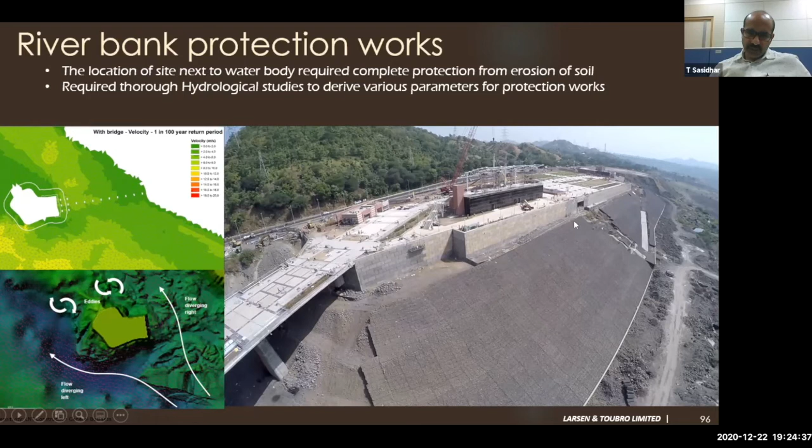And I think this is the last slide. I think I have done. I was pretty fast, but I have got almost all the aspects of the design and construction.